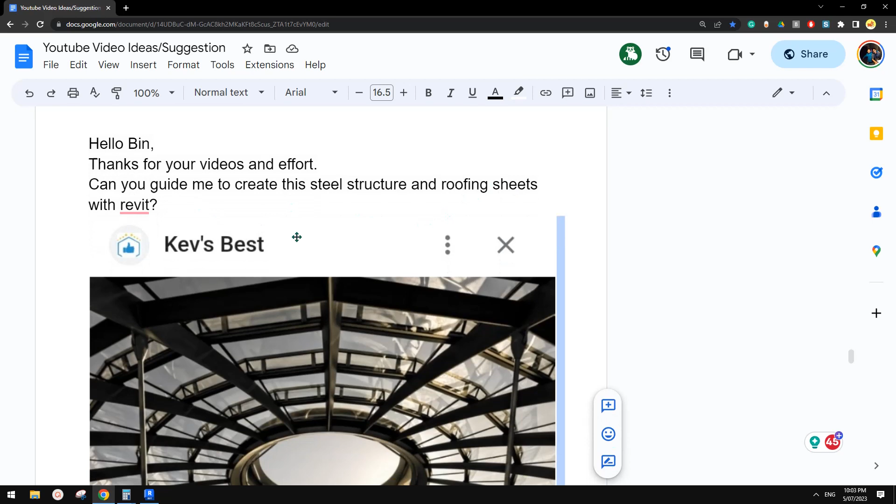So today let's try this one: steel structure and the roof sheeting. Okay, so I think this one can be massing, so it can be a mass, and then we can try to apply curtain system, and also for some like these beams, probably we can try adaptive family. So let's here, there's something you're not sure about those - what that's probably, they are some kind of truss system, but anyway, so let's try.

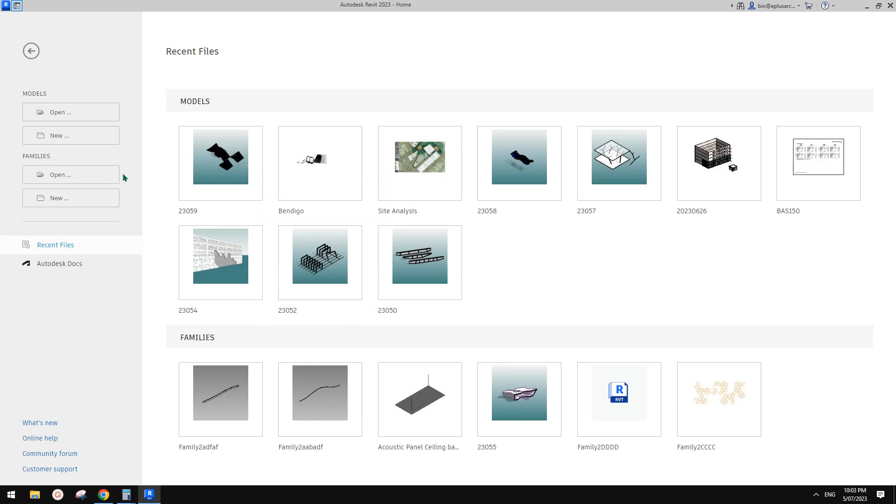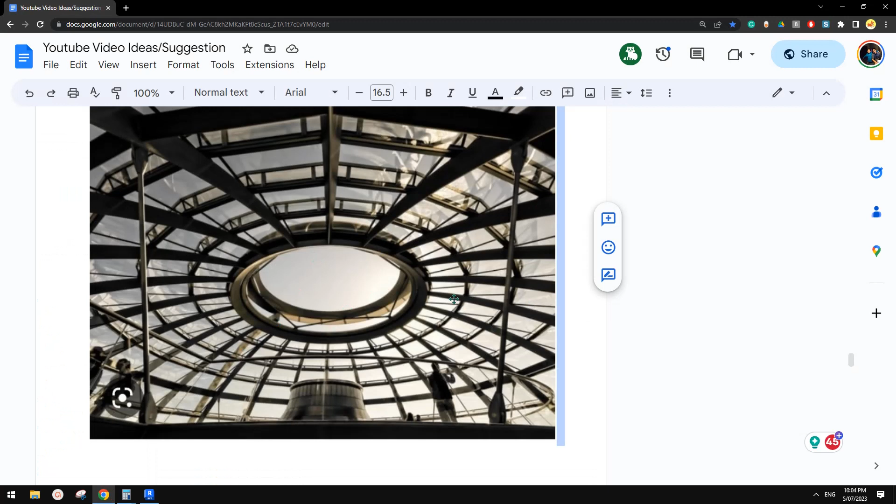So first we're going to create a project. We're going to use model in place mass. So let's start first. For this one, so we are going to create, so we're going to create some profile. So basically it's a revolve. So if I just do a screenshot, so what we're going to do is imagine that the shape.

So see here, this is center line. Okay, center line, and we just need this, the shape of this roof, this dome, and also this. You just need a line, a reference line in the center, and then you can just revolve to create this massing. Okay, so go to elevation.

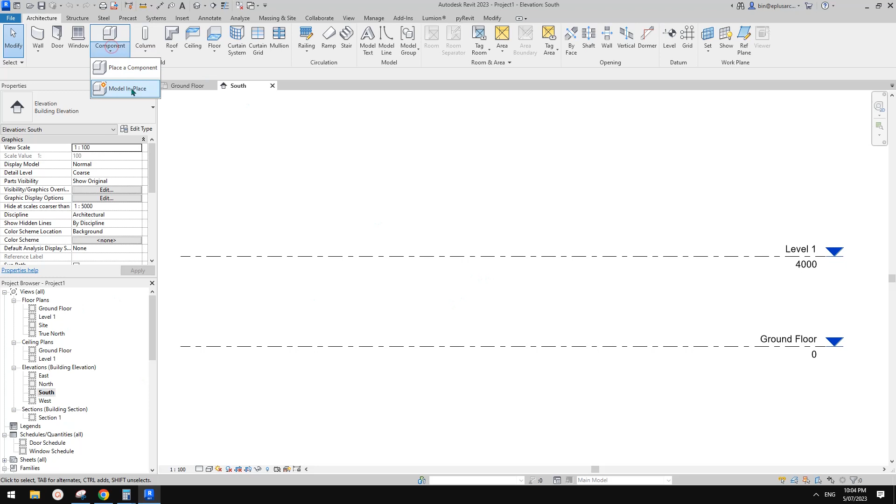So we're going to just do it, use model in place mass, and I'm going to just do it level 4 meter high. So first reference, we need a reference line in the middle. Okay, so it looks like we need to have some - we needed to pick some in order to draw a reference line, a vertical reference line. We need to have something, we need to pick a reference plane, a vertical reference plane.

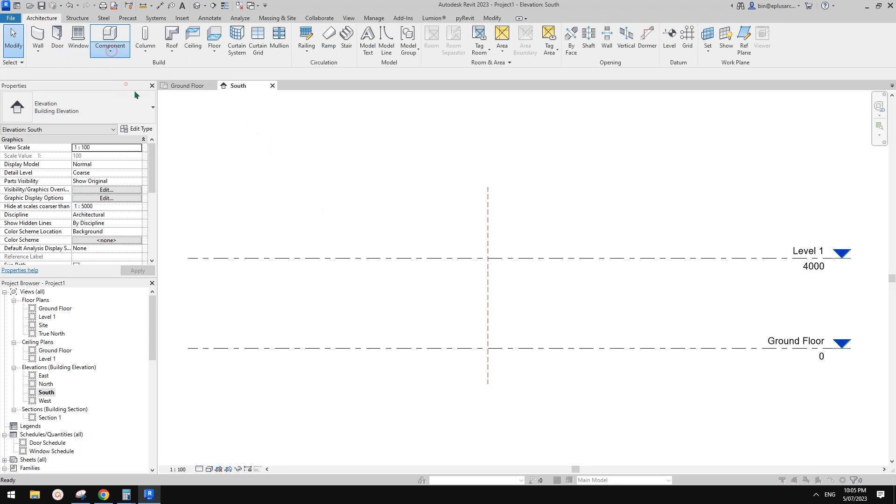So let's just cancel this. I'm going to create a reference plane first. So south elevation - hang on, let me think. So if we do a reference plane, then pick that, we will go to west. So yeah, that's fine, let's just do a reference plane. Okay, reference plane, and go create a component, model in place mass. And okay, so first we need to go create a reference line, and it will ask us which reference plane you want to use, which work plane you want to use. So let's pick a plane, pick this reference plane, and go to either west or east. Let's go to west elevation.

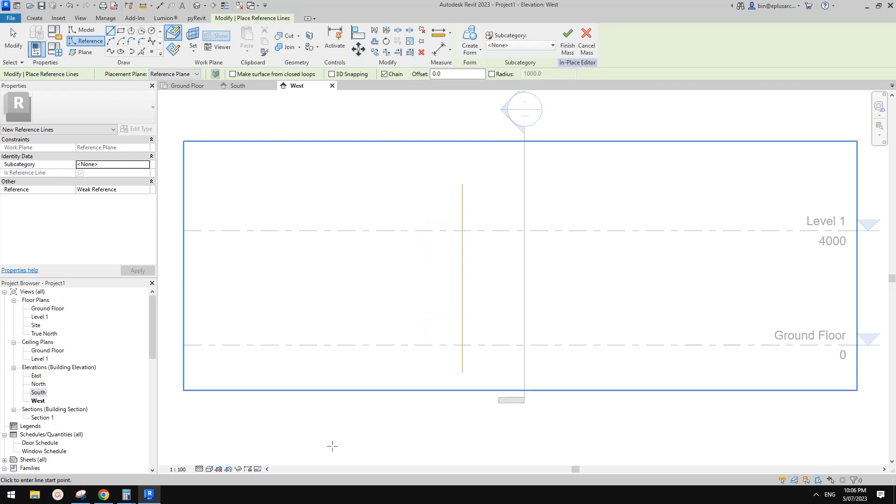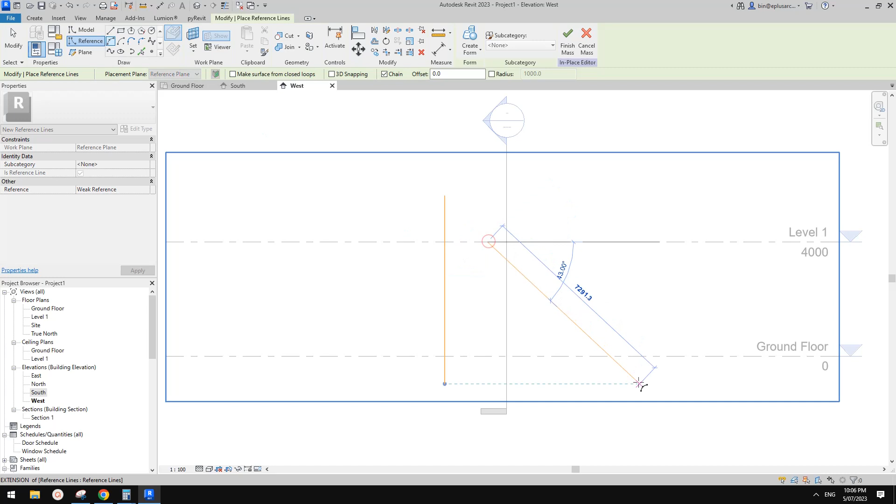Okay, so now we can start to place a reference line. So this will be the center line. So this one, this one, and then we need this - so we need another reference line. I'm going to use, you can use either spline or any of this. I'm going to use arc, so something like this. So if you want this top to be tangent to the level, you can draw a little line first, and then do a start and arc. So you will be able to do this, and then after that you can delete this bit. So now we have this and this, we can create a form.

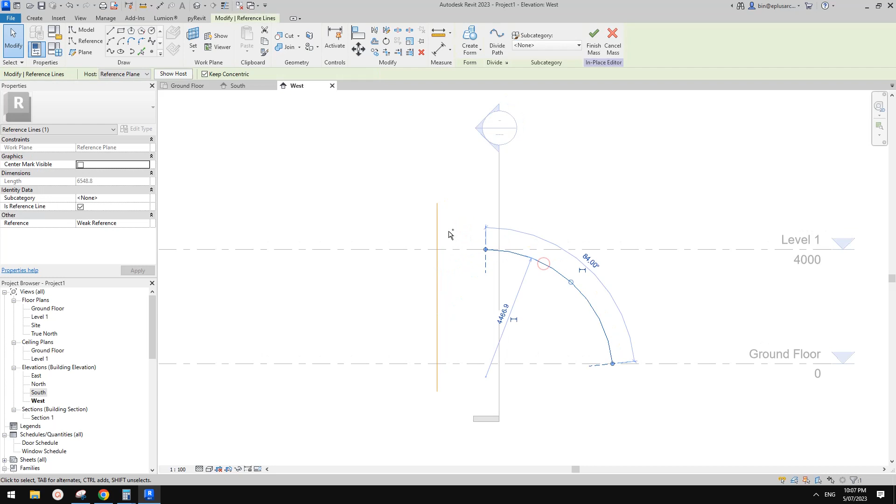Okay, so let's have a look in 3D view. So this is it, and then we can use divided surface, and what's next? Oh hang on, if we're using divided surface... and okay, so that's fine. Divide the surface only if we want to place some adaptive family or pattern-based family.

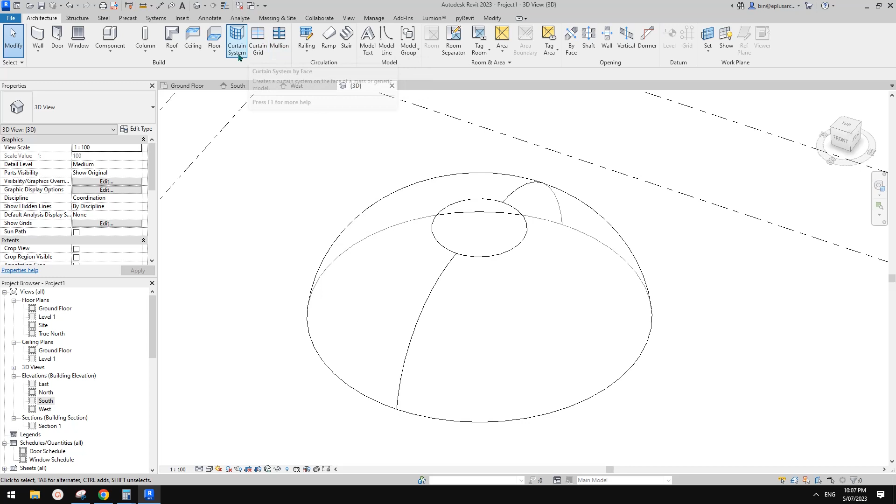So let's first, I'm going to try the curtain system first. So I'm going to Control Z, just bring back this surface and finish this. So I'll try architecture, curtain system, and pick this up and create. So this is actually, I think it should be okay because you can adjust the number.

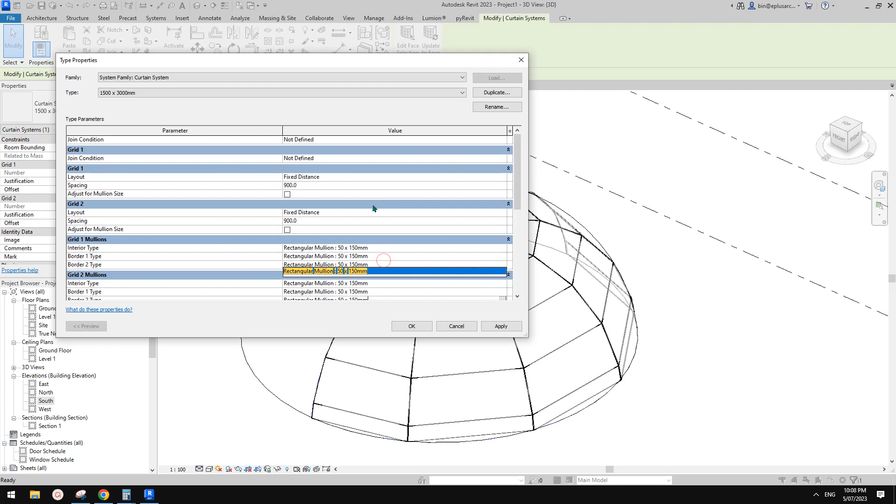So for example, I'll just edit type instead of using fixed distance. You can adjust this, so I'm going to just type 900 and 900 and see what happens. And also for the mullions, I'm going to just pick a mullion, so Control C, Control V, Control V, Control V, Control V, and a Control V. So also for the glazing, I'm going to use glazed apply. Okay, and then we have this. So maybe instead of fixed distance, we just use maximum spacing, so we can get rid of this smaller size. So I think this looks quite okay.

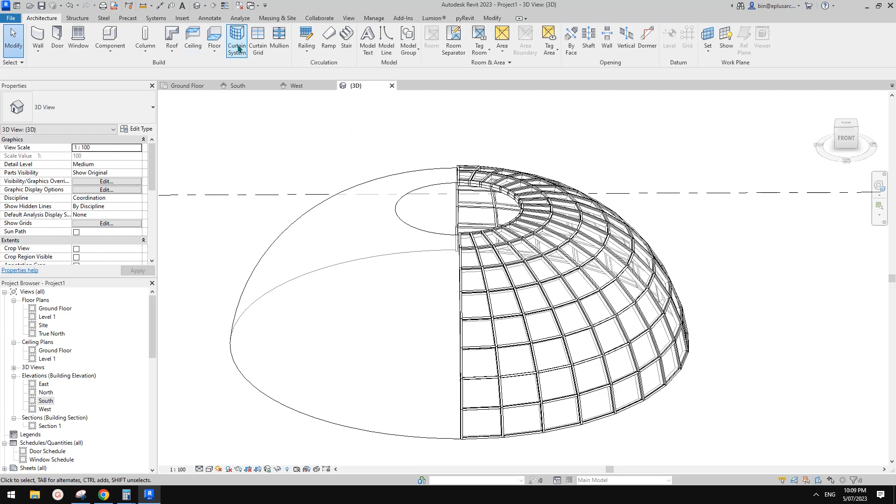Probably not those vertical truss type of structures, but something more simple. So we can just apply another one to it. And okay, so how about this? You can see this is not the same size.

It's like a sweep with a smaller profile on the top and a larger profile on the bottom. So probably we can do it using a curtain system.

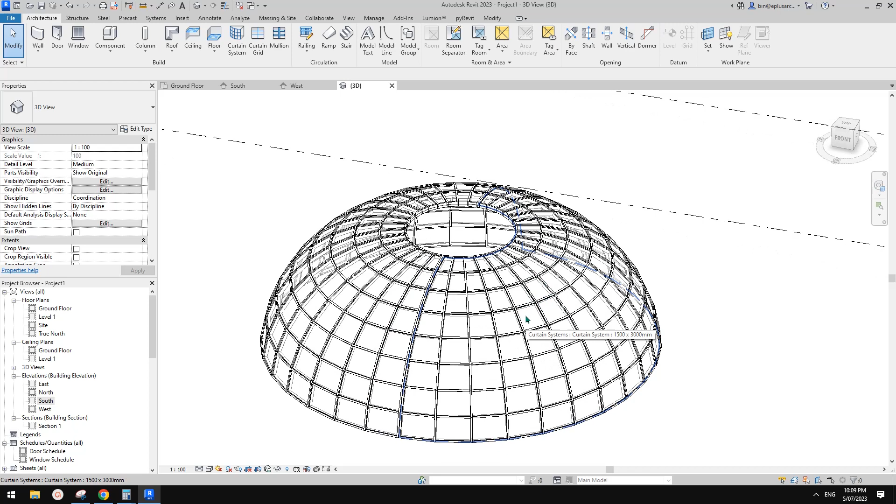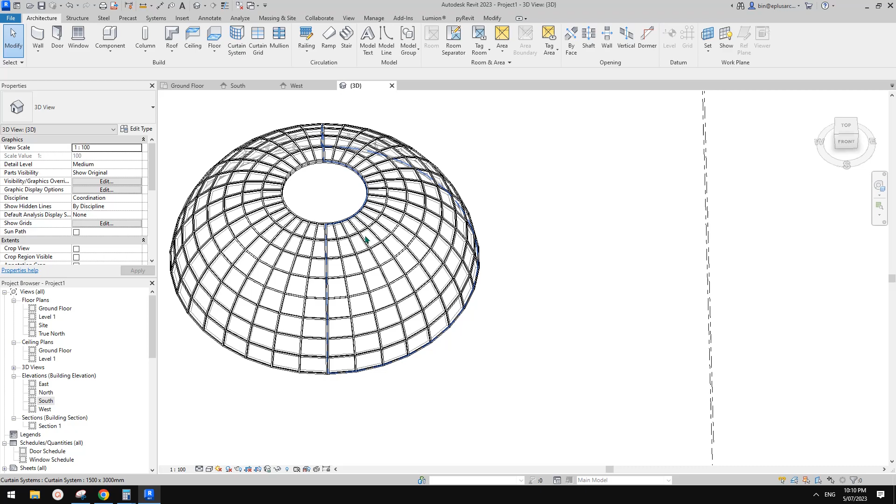Now I'm going to copy this one. So maybe we should go to the top and try to copy it here. CC. Okay, only half, that's fine. I'll delete the curtain system. Sorry, I picked the wrong one.

Try to tab and select the surface. Now this time let's try something different. Edit in place, so we're going to use divided surface. I'll select this and change it to maximum spacing, both 900 and 900. Okay, so this should match that one. Just ignore that part, only do this half.

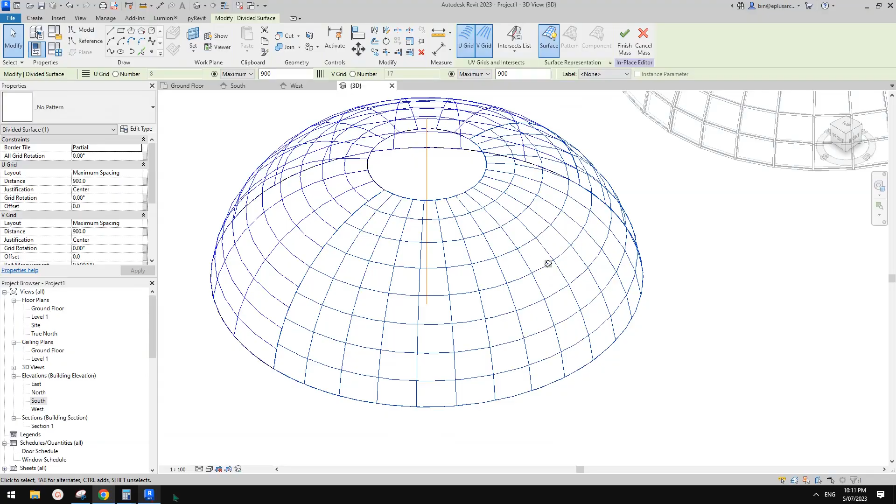So we can try to create a pattern-based family for this, and also include part of that vertical truss kind of structure. So let's do it, I'll just quickly make a family.

Just generic model, pattern based. Okay, in this one I'll just quickly - let me think, probably I'll just do a very simple frame. Yeah, it's a little bit hard to see.

Yeah, it looks like it's not flat, it's the vertical part. Anyway, let's have a try. So I imagine the vertical part and then connect. Okay, let's try that one.

First I want to know, 1, 2, 3, 4 - actually I'm not quite sure about the number. So I'll just place a vertical structure on point 1. Okay, so this is how it works: place a point, draw on work plane, set work plane, pick this horizontal work plane and place onto the point. Do it again, set work plane and place.

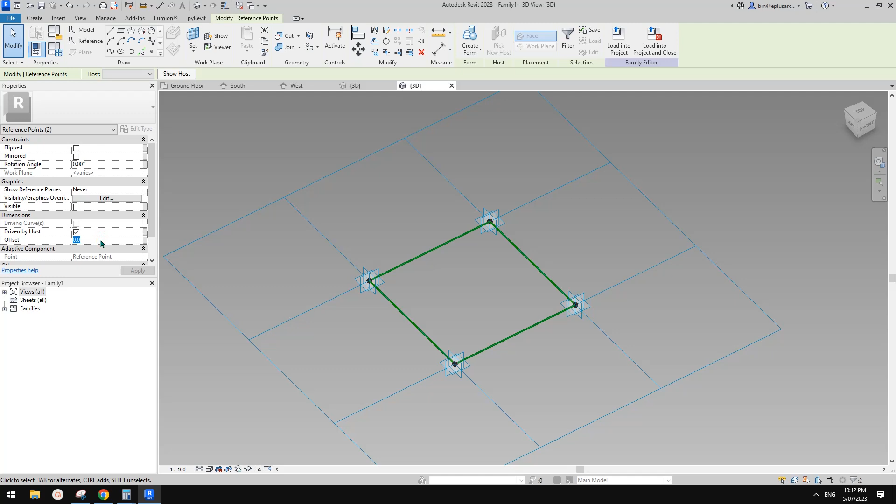Now select these two points, so you can type in a number. For example, I'll type in 300, right, 300. And then we can just create a reference line from this point - create reference line, create reference line. Now we can check the reference line, so this will become a path. We can create something like that.

Okay, I'll just quickly place a point to use draw on face here, and do maybe a circle - draw on work plane, set work plane, pick this point and create something like that. So very skinny, like a small circle. Now we can create.

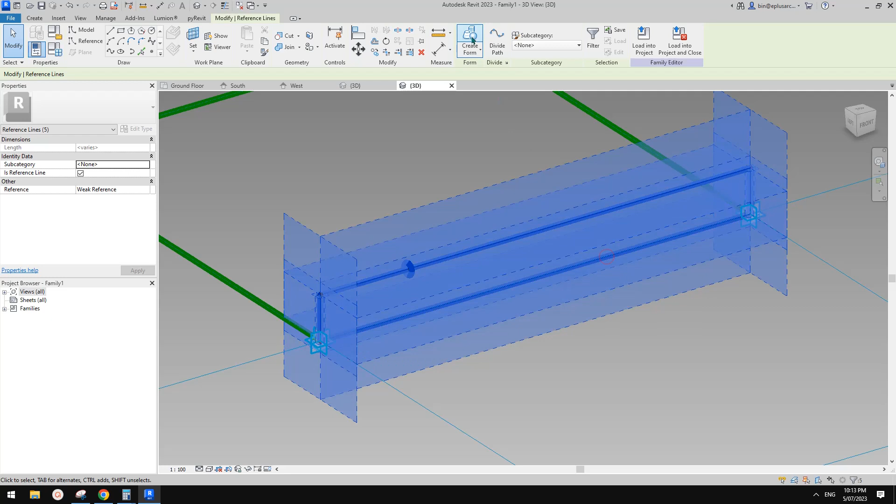So select this profile and together with this, create a form. So we can create something like this. And also if you need some vertical - you can see some extra vertical member - you can always place a point and draw on face.

Place it here, here, here, here. So select these two, so we can type in - both beginning, I'm not sure the number, 0.3 maybe. Sorry, the other side, 0.8. Okay, and then these two we can just give them 0.2.

Now we can just create a spline through point, and another spline through point. And then just make them reference lines. We can just select this - hang on, let me just TL.

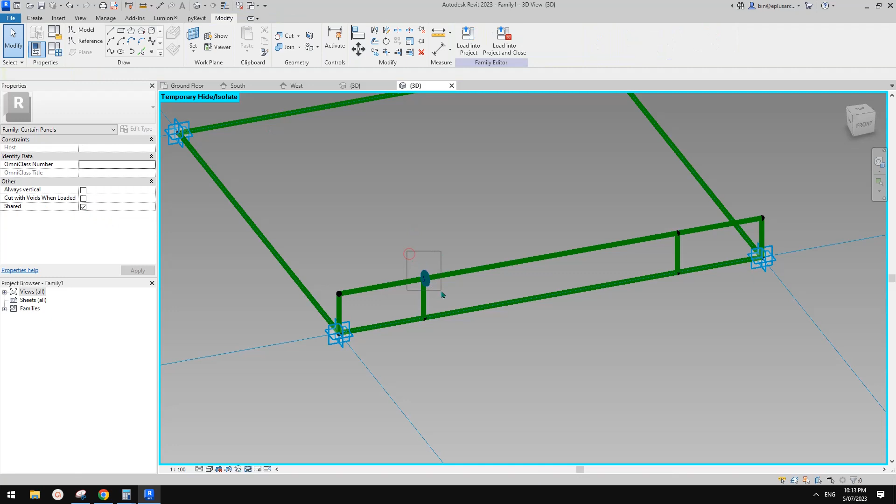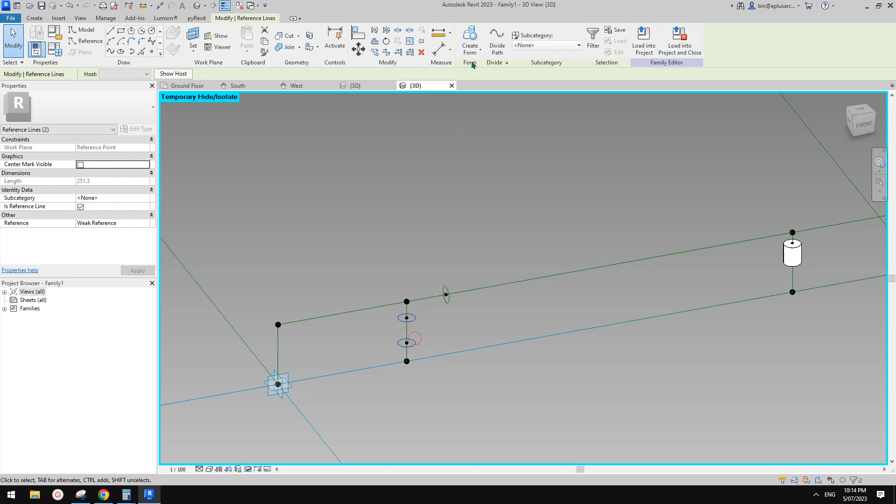So trying to copy this profile, CC, and pick new host onto this to make sure it works. I'll just place two. Okay, so then I'll copy this one to the other side and pick new host, and pick new host, and I'll create a form from these two and also a form from these two. And then drag this point to top, drag this point, and drag this point down, drag this point down.

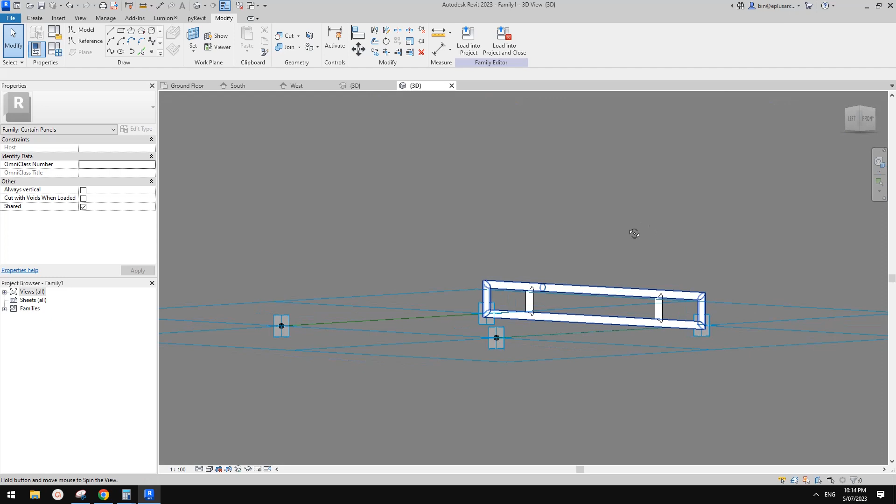So now we have type HR, so we have something like this. So maybe I'll just join this to make it nicer, right? All good, so this is some vertical structure.

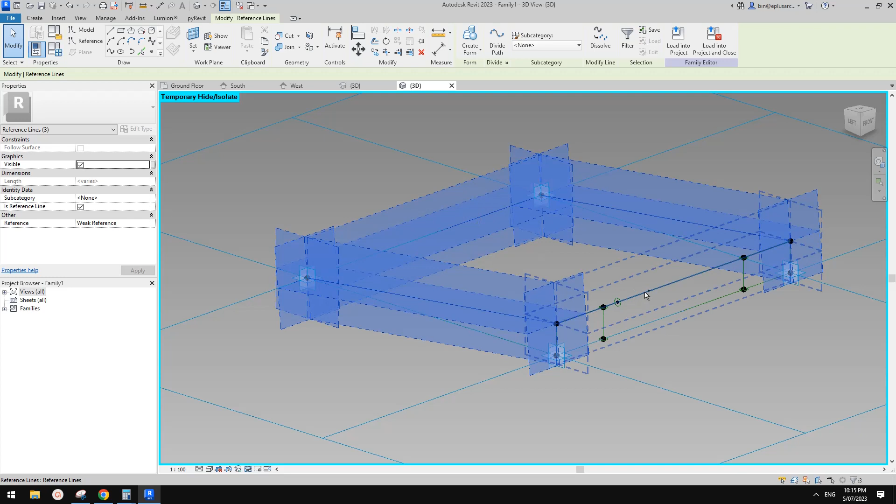And then we can HH them again. So then I'll just connect these two points and also connect these two points. Then make them reference lines, and somehow we can select all these reference lines, 1, 2, 3, 4 together. Or maybe we can use this profile and create another frame. Okay, type HR, yeah.

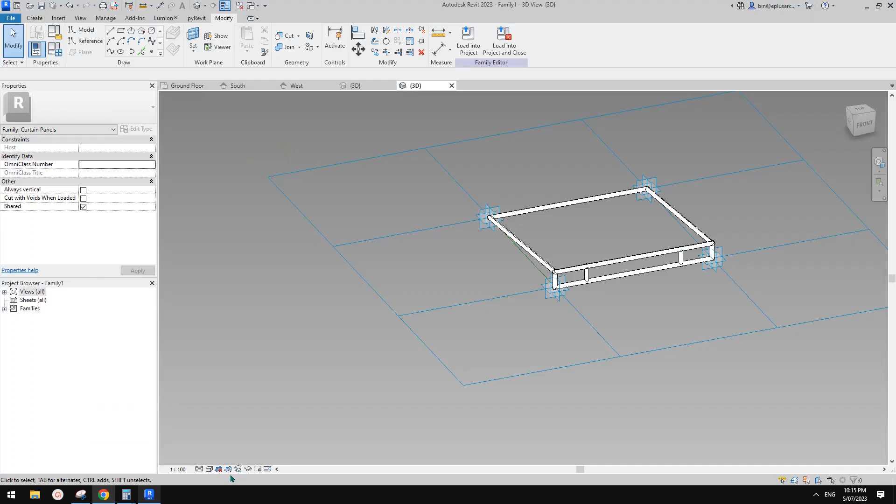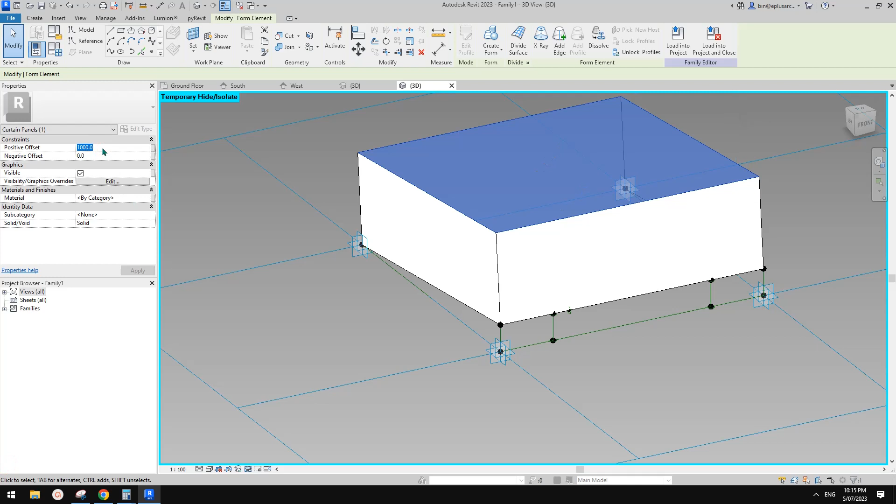It's a bit hard to see what's going on here, but I imagine that's a vertical and then the glazing. So for the glazing, let's hit HH the frame, so we can select 1, 2, HH again, 1, 2, 3, 4. With these 4 reference lines, we can create a form. So I'm going to just create a solid form with maybe 10 on each side and give it glass.

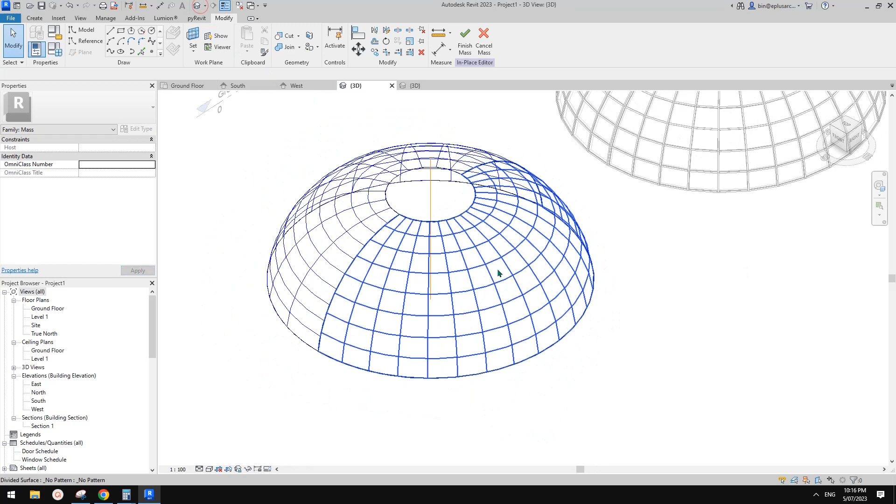Okay, so we have some panels. And if you wanted to, you can also create a panel here, maybe create a panel here and create a panel here. But for this one, I'm just going to load this one into the project. So now we can apply that onto this.

So let's try. Go to a rectangle, so see this family 1 we just did. Now we have something like this. Looks like round. Not sure, round side, I think.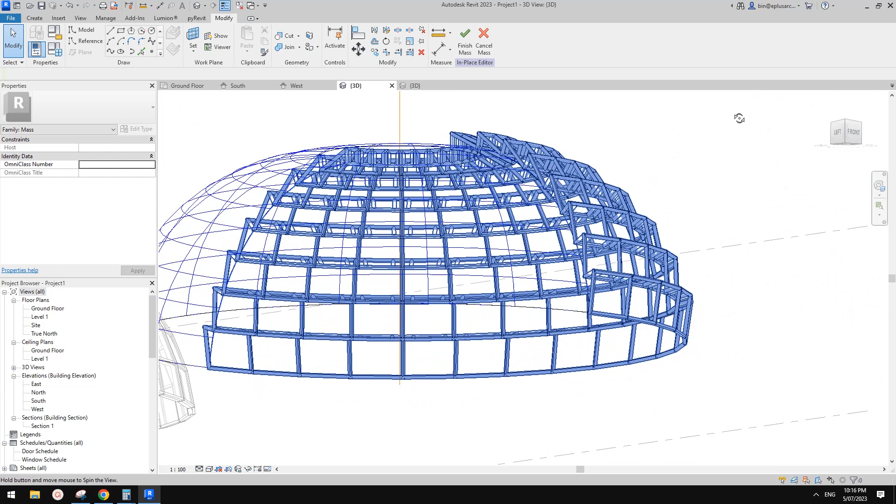That's fine. Let's try to component flip. Okay, so let's try flip. And I think it's more... yeah, I think it's better.

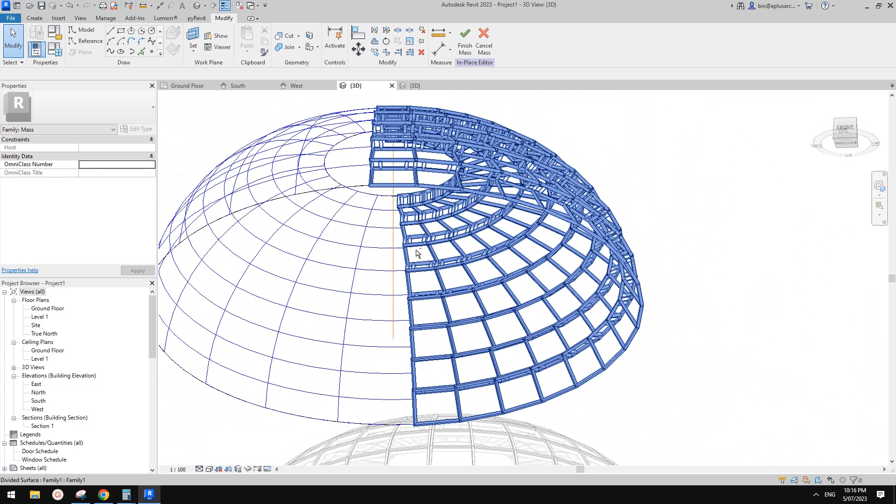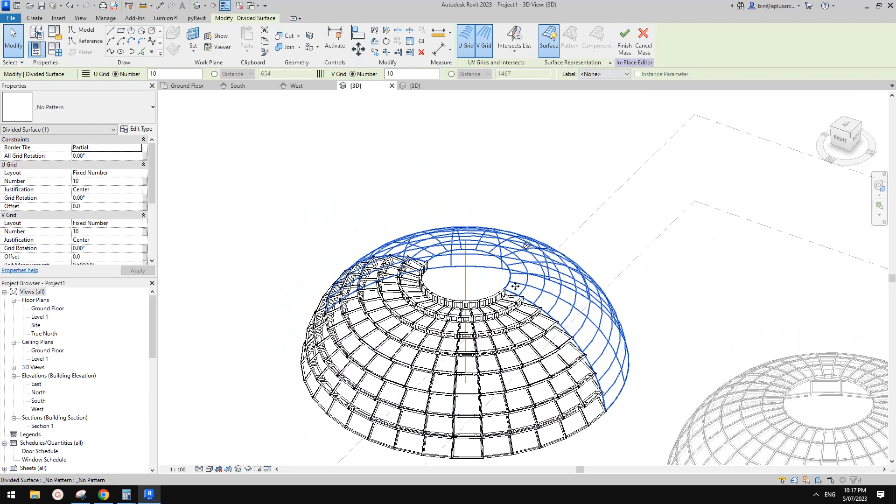And maybe we need to reduce the size or increase the size of this one, because probably this size is not big enough. Let's just have a look. So if I go, maybe this is 4 meters high. Hang on, I'm a bit lost. Okay, so this is top. Yeah, so just check here if you're not sure which side is top and which side is bottom. Yeah, maybe we should just go back and reduce the size.

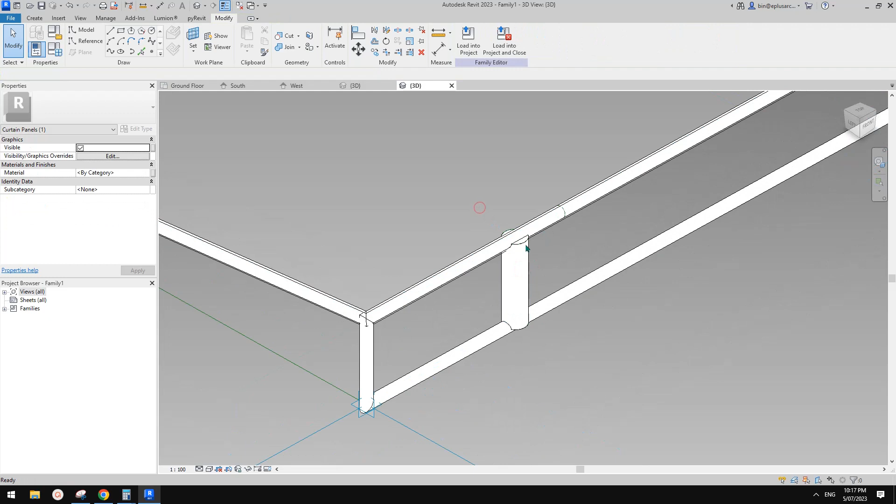So I'm going to just select this one, type in, maybe make it 20. Oh, doesn't work. 20, yeah. And do it to this as well. So 20, 20, and 20, and 20.

Okay, so now we load this one back in here. Override, go to 3D view. I think that's better. So if I type HD shade, so you can see those glazing, right? So I think that's okay.

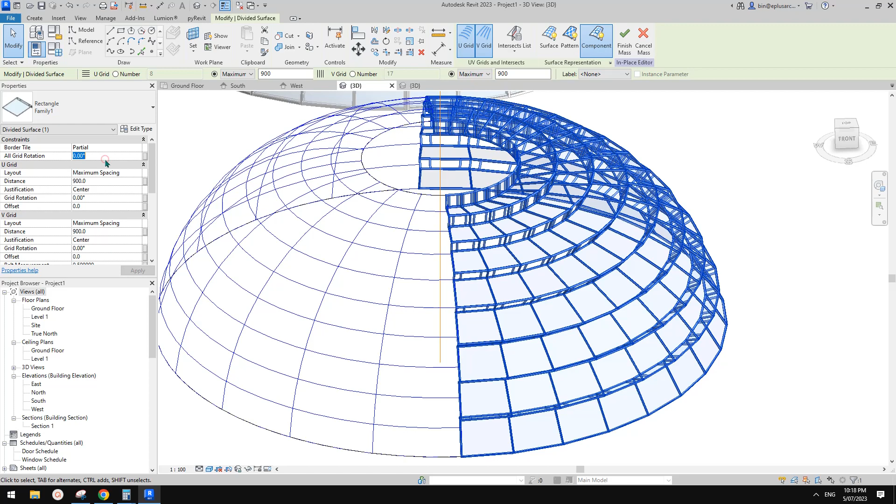Oh hell, I think it should turn around. I'll see if I can type 180 degrees. Yes, okay, maybe flip again. Yeah, I think that's better, right?

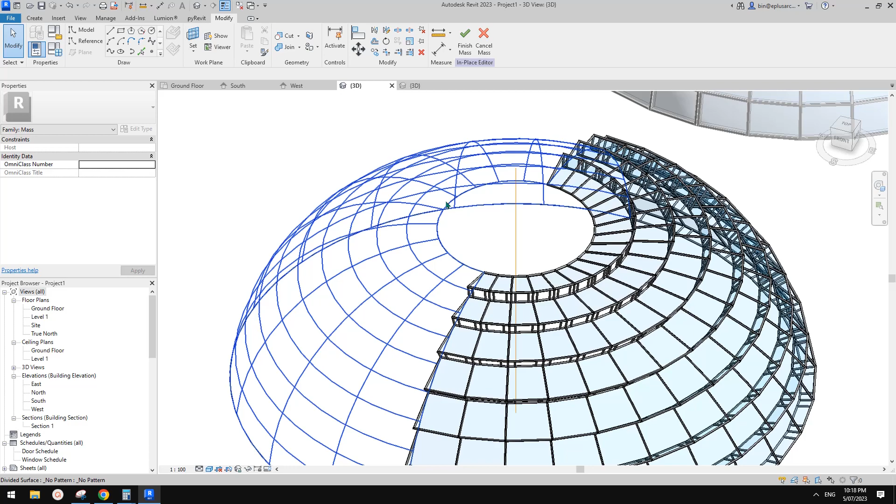So that, okay. So if you need to model something in the middle, I think it's quite simple. So let's just, what should we do? Maybe HH this, and see if we can just pick the line. Oh yeah, so you can just model in directly onto, place a point onto this edge, and then you can just draw any shape you like.

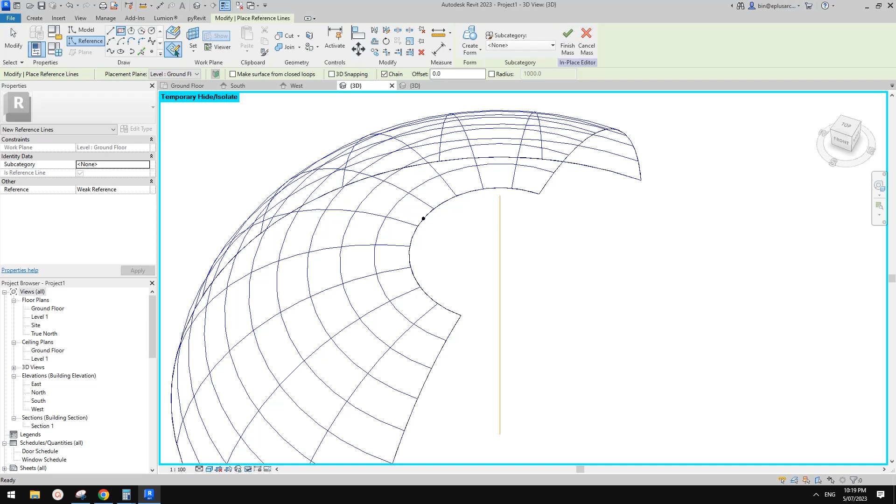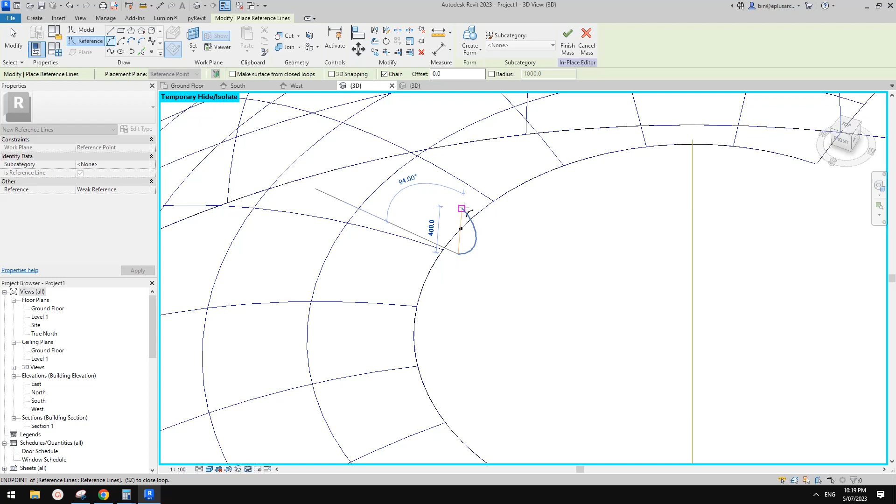So for example, let's have a look. I'm not sure about the shape, but okay, I'll draw something. Okay, so set work plane. And then we can just draw something, maybe just do an arc, and then do another arc. Okay, so that's great. And then select this profile tab, select this edge.

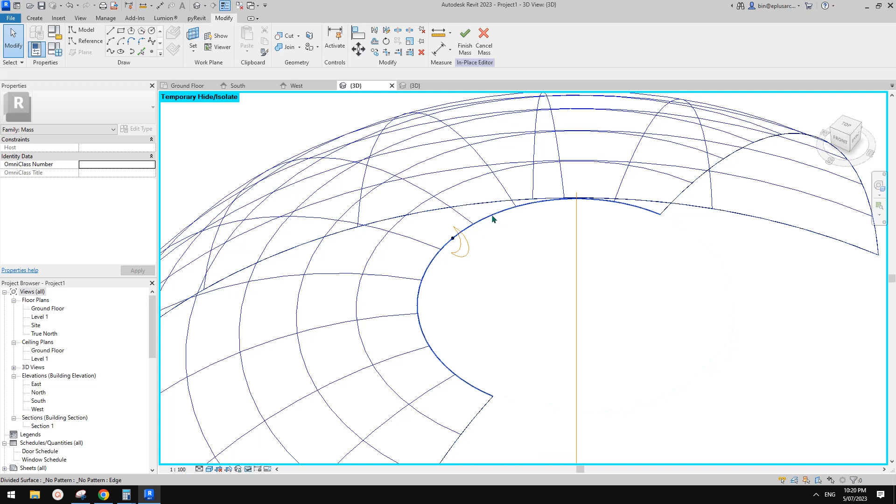So, doesn't work. Try again. Tab, this one? No. Tab, this and this. Doesn't work. Tab. Still doesn't work. That's fine.

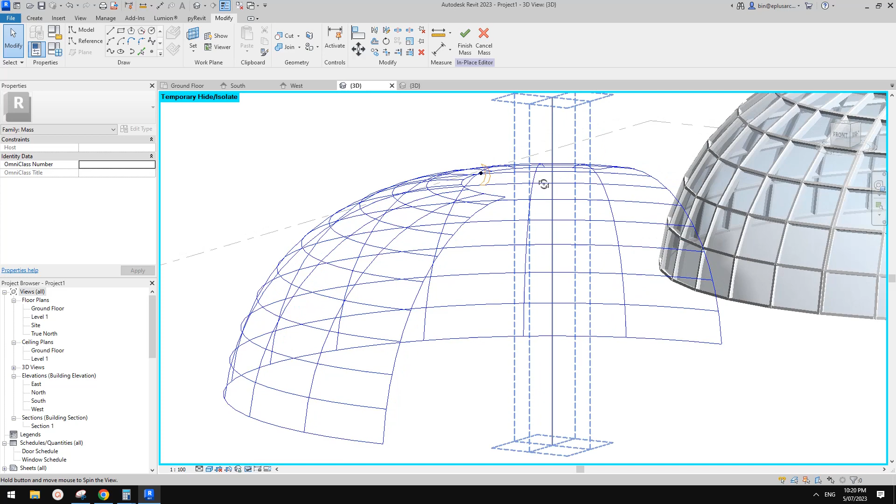If we can't do this, we can probably just do a reference line. Okay, so let's do it. So because when I draw this profile, I set this level at level 1, so we can directly place that path under level 1. Okay, so reference circle draw on work plane, so we can directly pick level 1. So let's click on this top, so it's easier because we have this center point here, right?

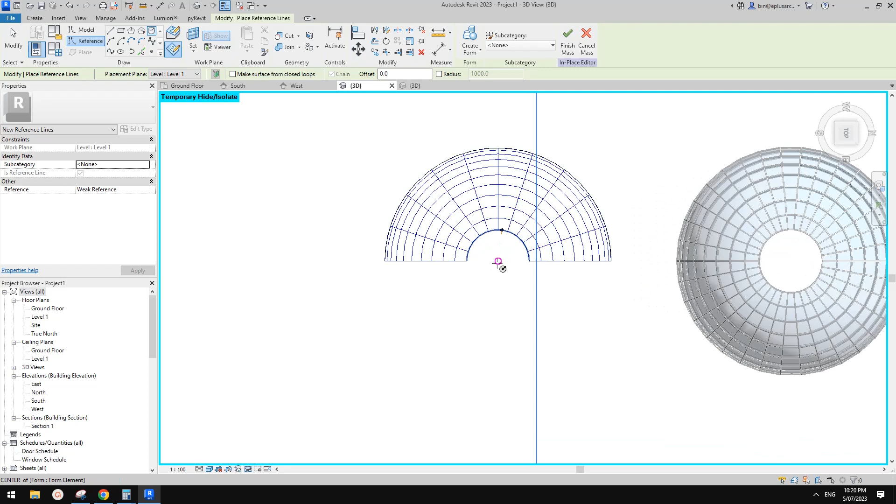So we can just draw something like here. Okay, so now we can select this point. So this point is the point we use to place this profile. So if we pick new host onto this reference line, then we can just create something from these two. Okay, so create a form.

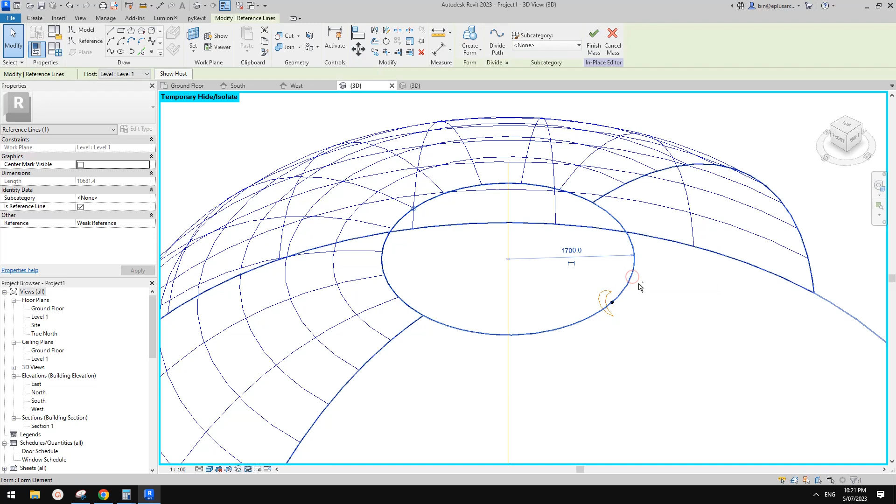So we have some structure on the top, right? And then you can just give it a material. So I'll just create a new one. And then that's it. Okay, so that's some structure on the top. Let's type HR to bring back the glazing.

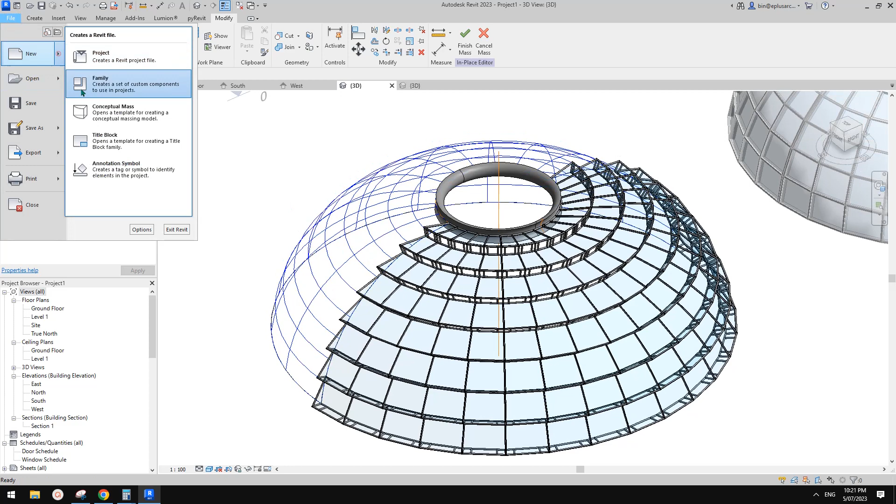Okay, so the last thing about this one, we need to create an adaptive family. So it's very simple, I think that we probably only need a 1, 2, 3 point adaptive. So let's create a new family, generic model, adaptive. Okay, and we'll create 1, 2, 3, and just select them, make adaptive, create spline through points, and make it a reference line. So now we just place a point, draw on face, place onto this, and place another.

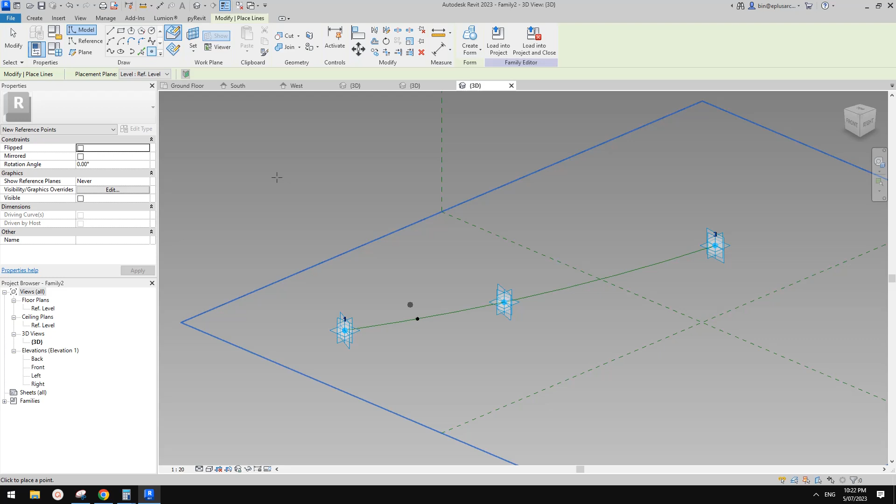Let's just do one first. So reference, let's do a rectangular shape, draw on work plane, set work plane, pick this point. So we can just create something.

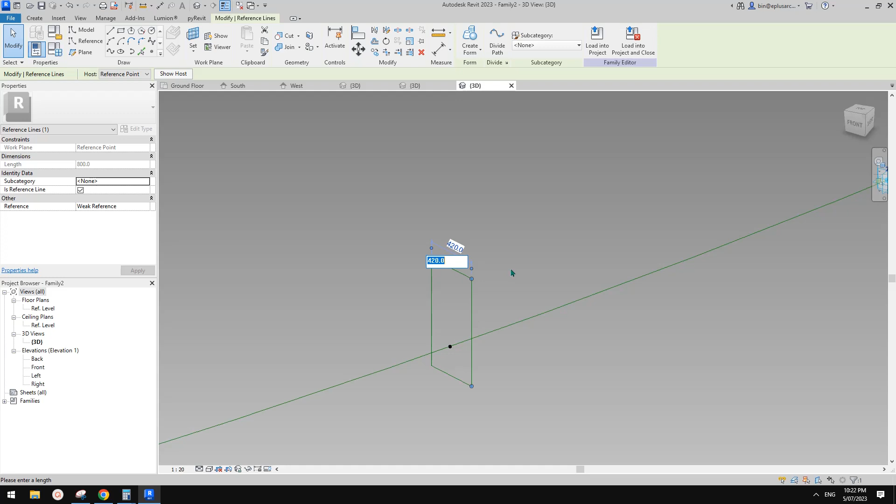Let's just roughly adjust the size, maybe 200. So this will be 1. If we place 1 first on the top, so we need this to be a little smaller. 200 by 300, is that, yeah, about, I think that's okay.

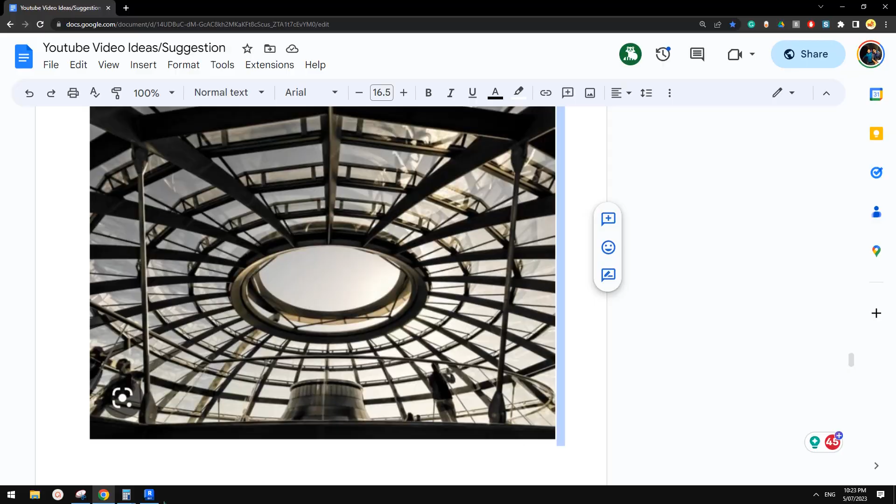And also I think when we place, it probably needs to come down, so maybe just lower this to roughly there. Okay, so that's good. I copy and place this point, pick a new host, and then we just need to increase this, maybe make it 500.

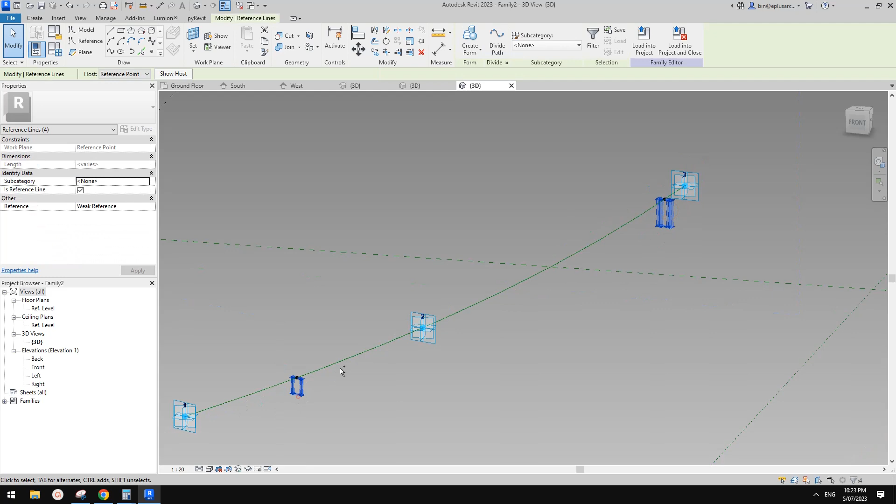Okay, so now we can create 1, 2, 3, select profile and path, create a form, and we can just drag this to the end and this one. Okay, so now let's load this one into the project.

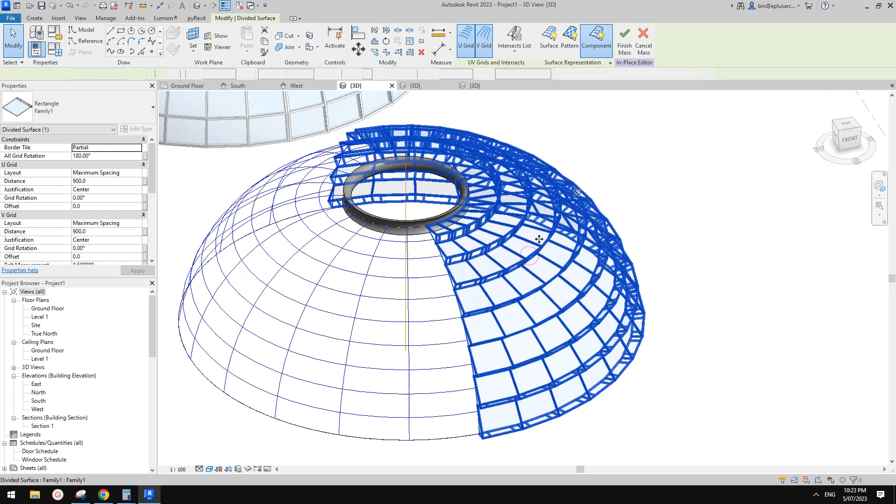Go to 3D view. So cancel this because we need to show the nodes. So let's select this and turn on the nodes. It's not visible. I think we should turn on the surface. Go there and nodes. Okay, so once we turn on the nodes, still not visible.

Maybe let's just turn on the component for now. Okay, so now you can see the nodes. So create component. So let's start from the top one, roughly in the middle, and then the last one here.

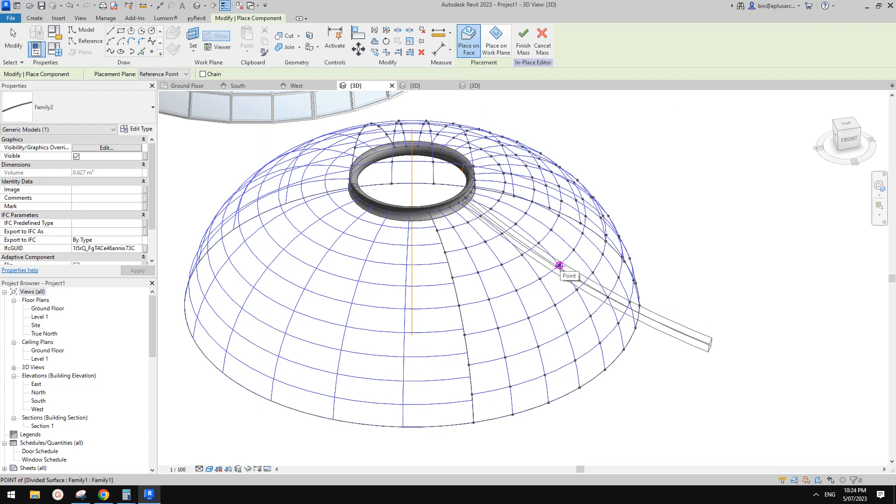So now we have some issue here. You can see the orientation of this one's not quite right. So I think that we can just go back and maybe try always vertical. So load this back, overwrite, and that's it.

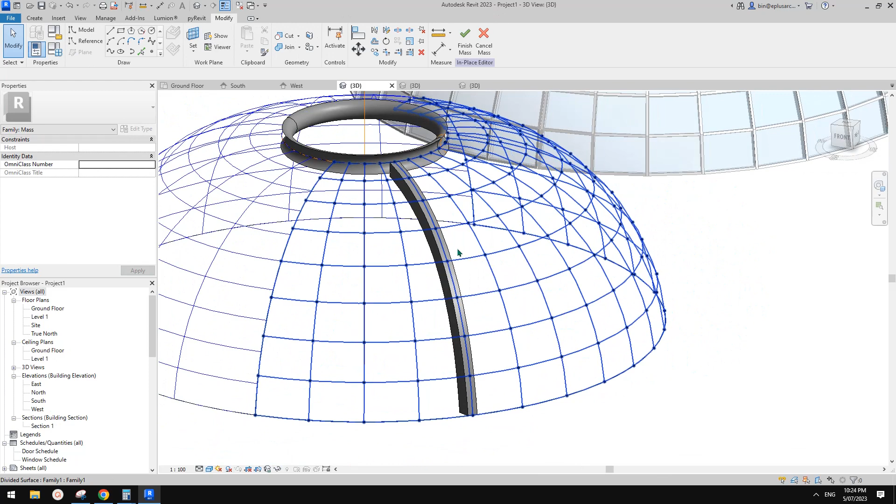Okay, so now we can select this structure and we can just repeat. And I think it's too big. That's fine. We can go back and edit this form.

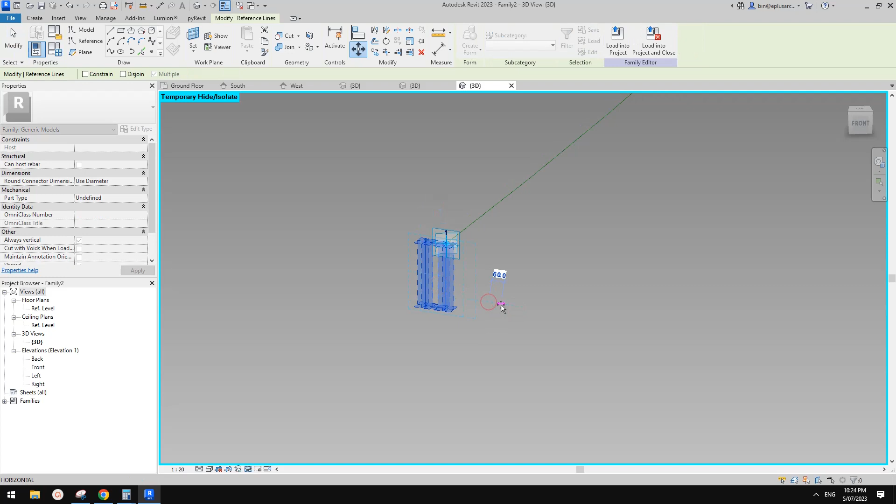We can just make this smaller. So 200, maybe make it 100. And also move it on the other side by 50, so it's still roughly in the center. And we can do the same, or we can just type 150 and then type 100.

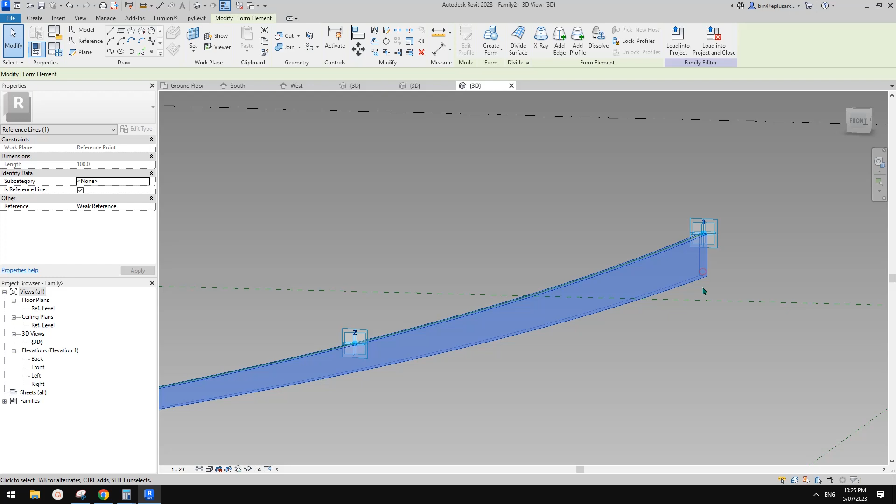Okay, so now, so you can see it's smaller. Maybe also reduce the size here as well, and maybe here. Let's just do wireframe, 400, for example, 200 to 400. So now let's load this one into the project, overwrite.

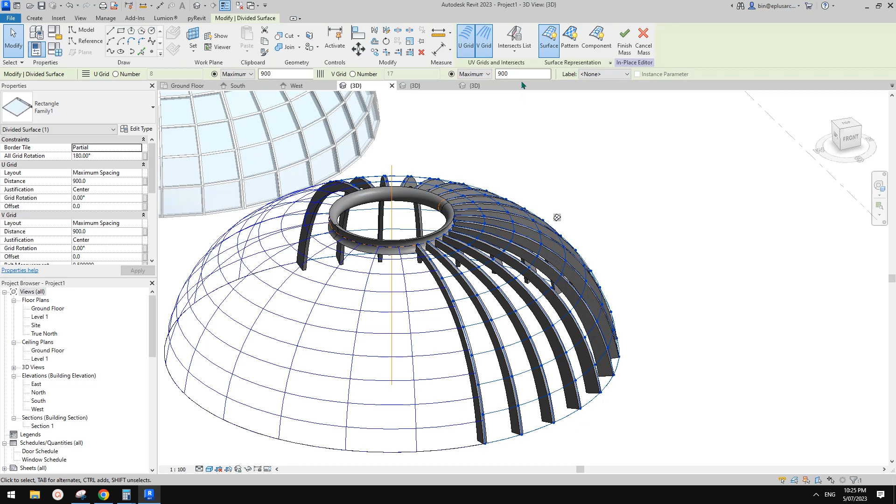Yeah, I think that's better. So now let's select this divided surface and turn off the... so turn on the component, turn off the surface, and then I think that's probably it. Okay, and then quickly let's just do this side as well.

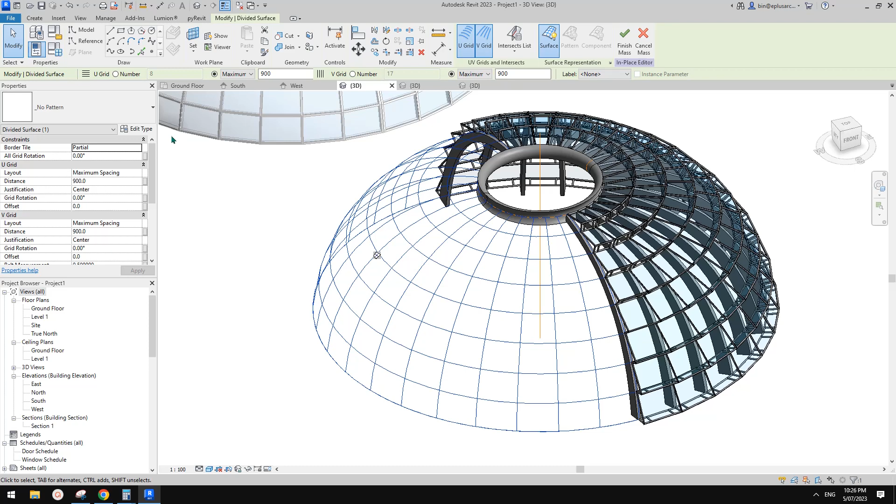So first, when you change the grids, so 900 and 900 with maximum spacing. Okay, so then we can just select this divided surface and change them to the family 1, and then we might need to adjust 90 degree, 180 degree. Yeah, I think that's all good.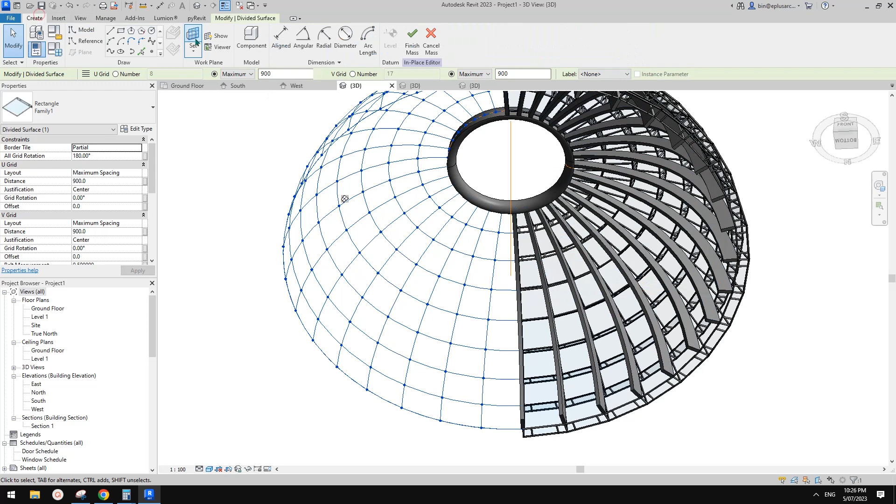And then we can just apply, select this divided surface, turn off component, turn on surface, go to surface representation, turn on the nodes, so we can place adaptive family onto here.

Looks like we have some issue placing that point. That's fine, wireframe. So now we can place. Okay, so 1, the second point will be roughly here, and the last one here.

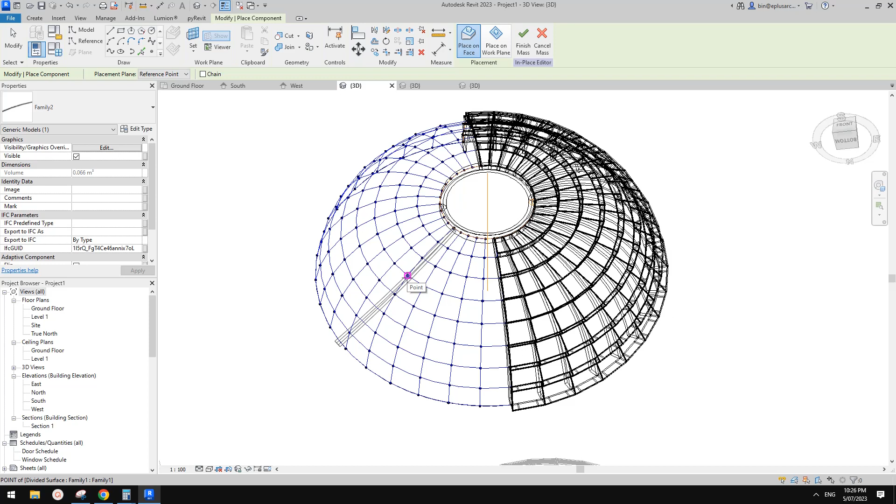And then select it, repeat. Okay, so now type SD shade and select this divided surface, turn on the component, turn off surface. And that's it, and Finish Mass. And so this is it.

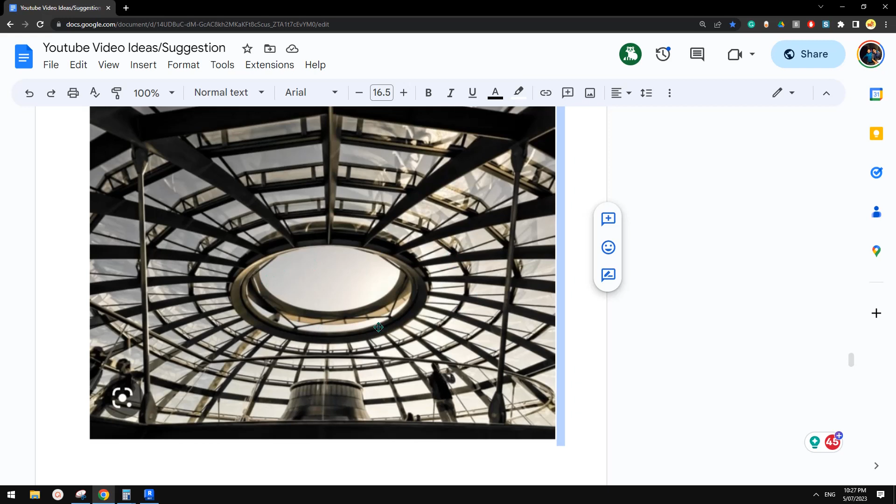There are still some other structures, but I think the main one, you can probe some extra details, but I think that can be quite easy. And this is it. So yeah, you probably want to add some glazing on the side as well.

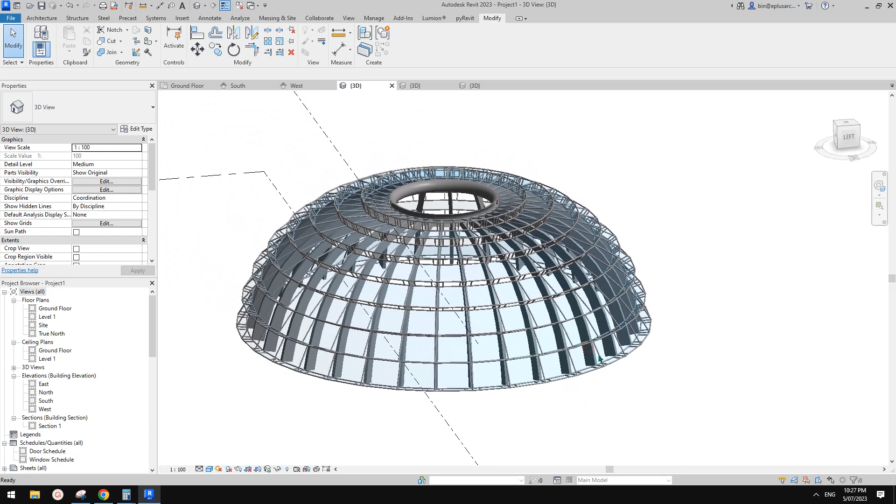But it's quite nice, natural ventilation. Okay, so that's it.